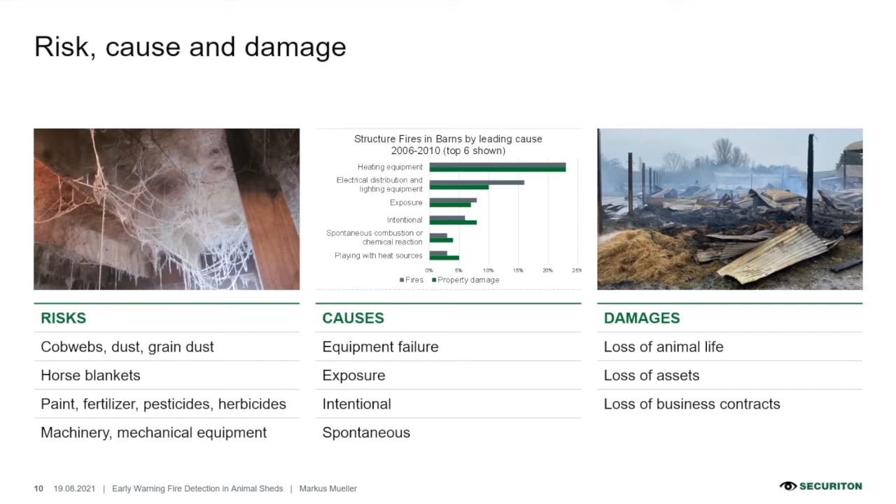While the NFPA states that $38 million in property damage was caused annually between 2006 and 2010, the Animal Welfare Institute focuses on the loss of animal life and highlights that from 2013 to 2017, more than 2.7 million US farm animals died in barn fires that potentially could have been prevented. Consequential loss of business contracts and the economic damage resulting from it to the farmers themselves is considered substantial, although it is statistically not widely documented.

Barns and animal sheds pose several challenges to an effective fire protection system, such as environmental challenges. We have high humidity and aggressive gases. We have overvoltage surges due to lightning strikes. We have loads of dirt and dust due to material handling, such as straw or hay. An animal shed, the facility itself, is a large, partly open space in which changes in the airflow are very common, as cooling may be required during the summer and heating during the winter. Airflow conditions may also change during the day.

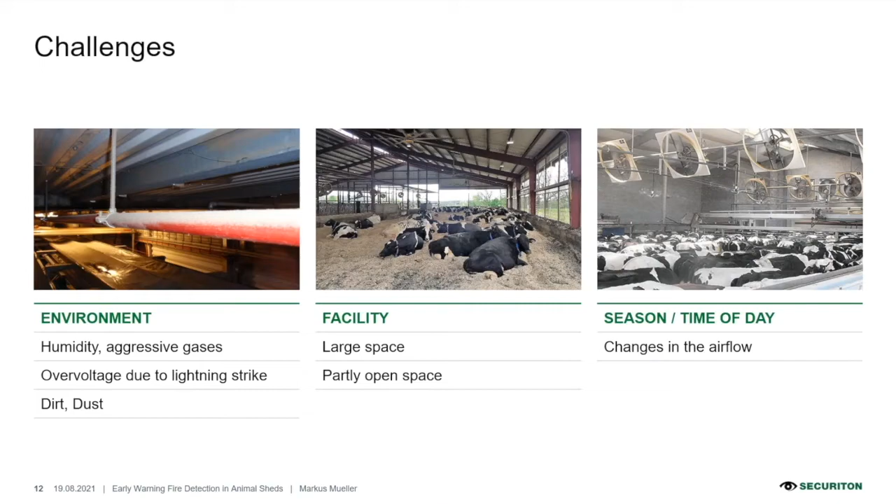There are only few regulations in force. For Scandinavian countries, for example, there are codes and standards in force which cover the requirement for products used, here the FG 743, and also their application in farming facilities, here the NS 3960. The design of a fire detection system needs to be simple and to meet deemed-to-satisfy fire and building safety provisions, such as the NFPA 1, NFPA 72, or the British Standard 5839-1.

However, applying a performance-based design approach addresses risk-based detection needs over and beyond prescriptive requirements to ensure business operations and asset protection as recommended, for example, in NFPA 150 or CFPA E17. What does applying a performance-based design approach to address risk-based detection needs mean? To answer that question, we need to look at it from different perspectives.

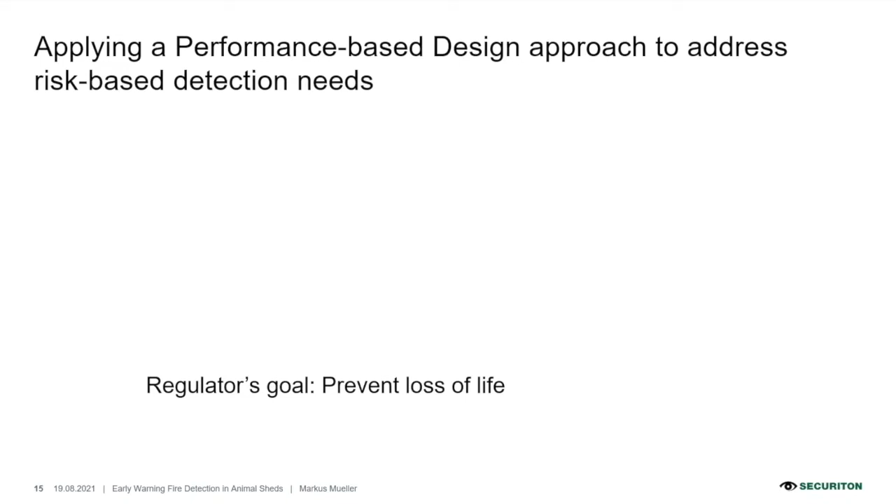The regulators, for one, their perspective is to protect lives. The regulators issue codes and standards to cover health and safety of persons and not necessarily of animals in our context. Codes and standards such as the NFPA 15, the standard for water spray fixed systems for fire protection, cover these health and safety issues. However, the regulator does not concern themselves with asset protection or property loss issues. That is the domain of the insurers.

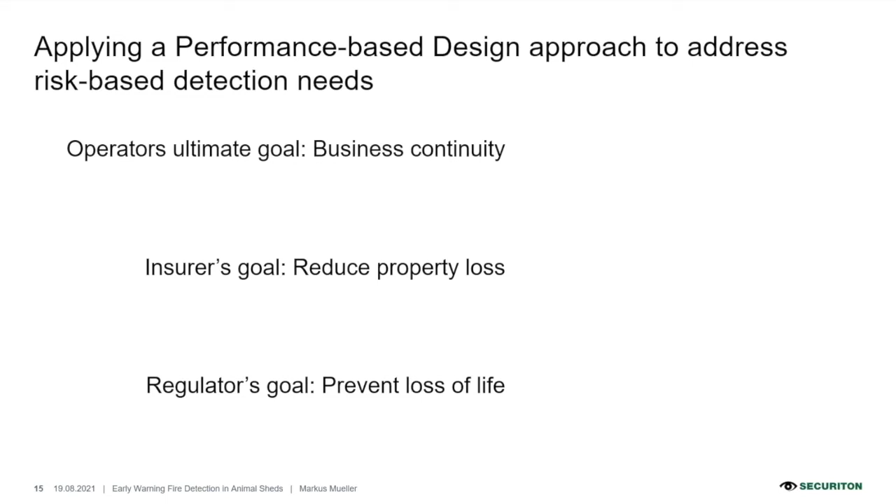FM Global issues recommendations such as the Property Loss Prevention Data Sheet, the DS 9-19, which covers wildland fire, with some issues in it relevant to the farming industry. But they offer no coverage for prolonged business interruption. The operator's ultimate goal is ensuring that his business runs smoothly. Now, how do we achieve all this?

Compliance-based design mainly covers the regulator's goal. To cover the other two goals, we need to apply a performance-based design approach. That is to consider fire ignition scenarios and design for these scenarios. In other words, we need to seriously ramp up from sprinklers. We need early warning coupled with a decisive response.

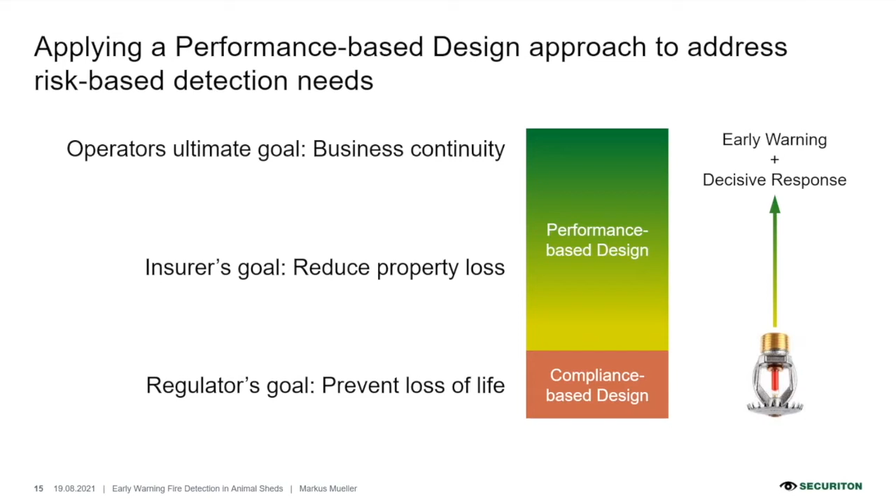Before I touch on the application scenarios, harsh environments in animal sheds, the range of solutions approved varies considerably. The approved solution to overcome the challenges that I mentioned before is to design a reliable early warning fire detection system with multiple alert levels that is capable of operating in harsh environments with aggressive gases, high humidity, and lightning strikes. But before we look at some key design factors in more detail, let's explore early warning fire detection a bit further.

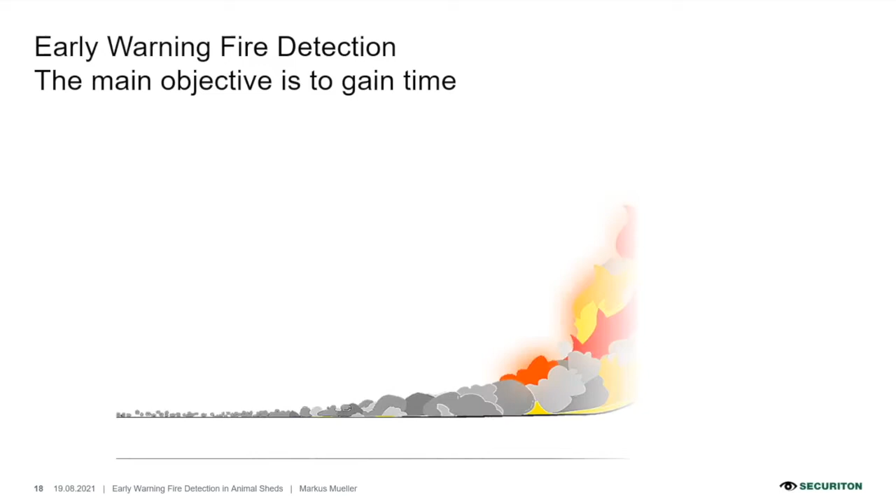The key objective of an early warning fire detection is to gain time. Time to adequately react to the development stages of a fire. This is the typical development of a fire. In its incipient stage, for example, caused by a smoldering wire due to an overload, there is only limited smoke produced. Again, the incipient stage may develop over hours or in some cases over days.

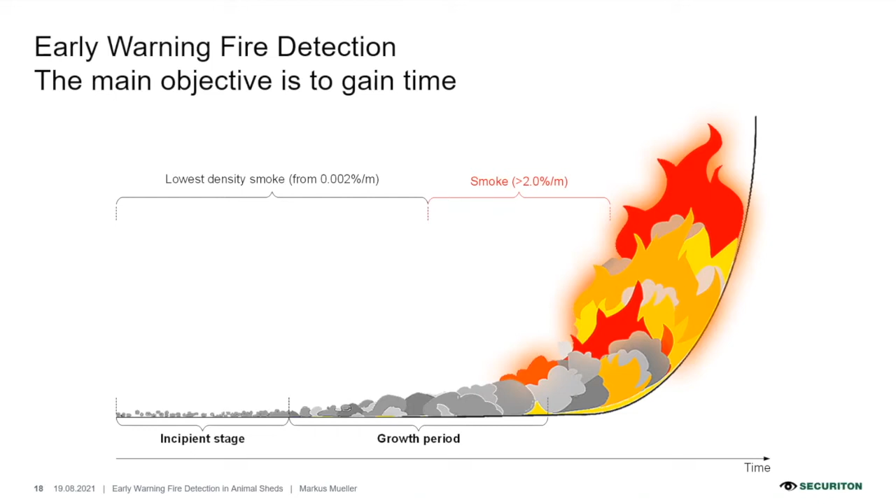To reach the growth period of a fire, during the early stages of a fire, the smoke concentration is typically below 2% per meter obscurity. Only in later stages, the smoke concentration will rise above 2% per meter, thus reaching a level where a standard point-type smoke detector could possibly trigger an alarm. However, standard point-type detectors do not meet the challenges we mentioned earlier.

A fire must reach a significant size to release enough heat to initiate sprinklers. Once the fire service is called, the fire brigade will take some time to reach the location. They will then need a certain time to assess the situation and set up gear before they can start fighting the fire. From a business continuation and asset protection point of view, clearly, an early detection of a fire minimizes loss and interruption, while the later a fire is detected, the greater our loss and business interruption.

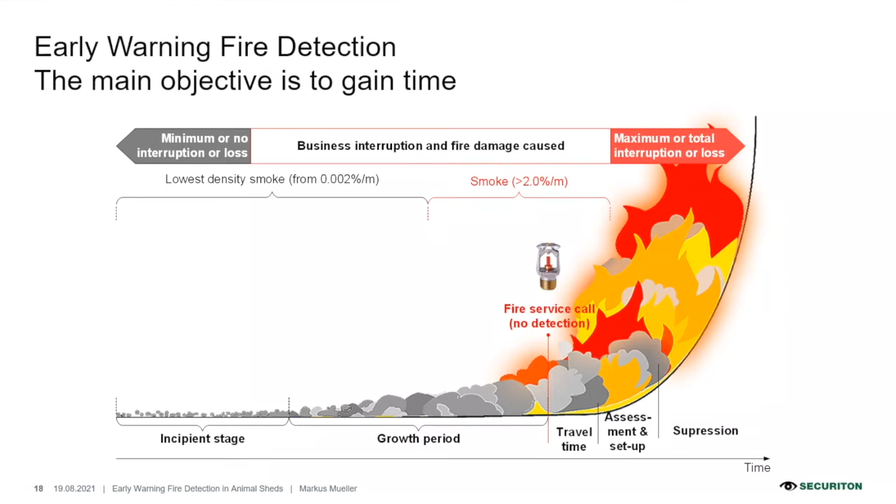As I mentioned earlier, we want to ramp up from sprinklers alone to an early warning system and a decisive response. That is where the 5 levels of SecuriSmoke ASD 535 HD come into play. Detected at the first level, a fire incident can be prevented in most cases. If the smoke concentration rises to trigger the second level, local firefighting may help prevent larger damage.

At a later stage, shutting down ventilation systems and starting the evacuation of the animals may be the right response to the developing situation before a fire service call is issued, notably a lot earlier than with sprinklers alone. Remember, it's all about gaining time. Even before the fire releases a thermal load to initiate the sprinklers, triggering a pre-action suppression system helps minimize losses.

Now, before we dig into some key design factors, I would be happy to answer a few spontaneous questions.

Markus, I've got a question. Is the aspiration smoke detection principle suitable for all types of animals in sheds? Or can it be used for horses, cows, and other animals? Yes, that's it.

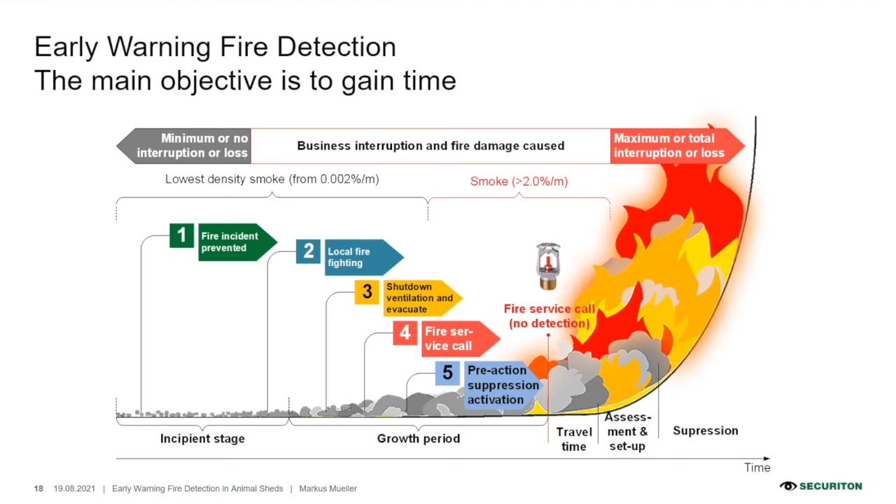Thank you. Okay, now what are the key design factors? As animal shed design and utilizations differ, we just found out cows, horses, pigs, and so on, the fire protection solutions differ as well. When designing an early fire detection solution based on the SecuriSmoke ASD, bear in mind the following key factors. Use the SecuriSmoke ASD 535 HD and the accessories which are hardened for the use in environments with corrosive gases and feature an enhanced overvoltage protection.

Airflow changes within the protected area due to ventilation systems installed and/or natural ventilation. Bear in mind the general characteristics of the building or the protected area. For example, is it a flat roof, a pitched roof with or without ventilation through openings in the pediment, considering possible smoke stratification effects, and so on. Consider the general partitioning of the protected area. For example, are there milking stalls, individual stalls for calves and foals, and so on.

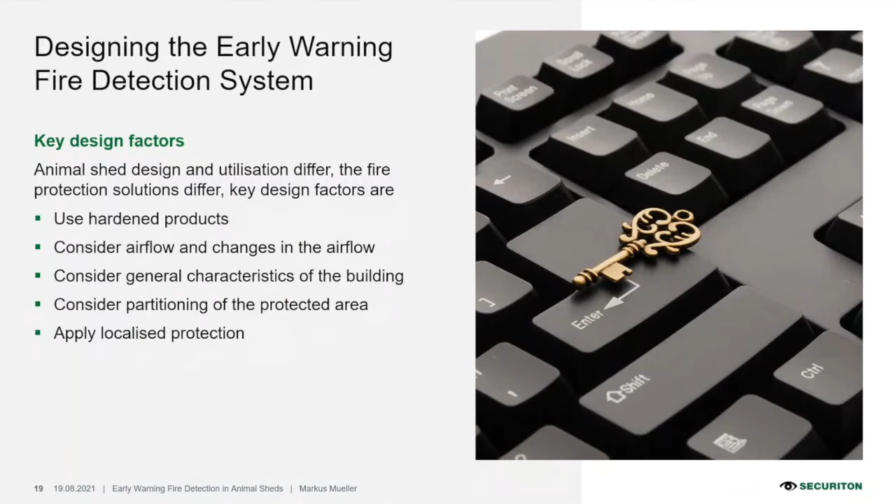Apply localized protection of electrical equipment, such as robotic mixers or feeders, grooming brushes, milking stalls, and so on. And last but not least, ensure that alarm and fault notifications mentioned before, the 5 levels, can be heard and are also reacted upon, in particular in cases where the shed is at a remote location or is operated completely unattended.

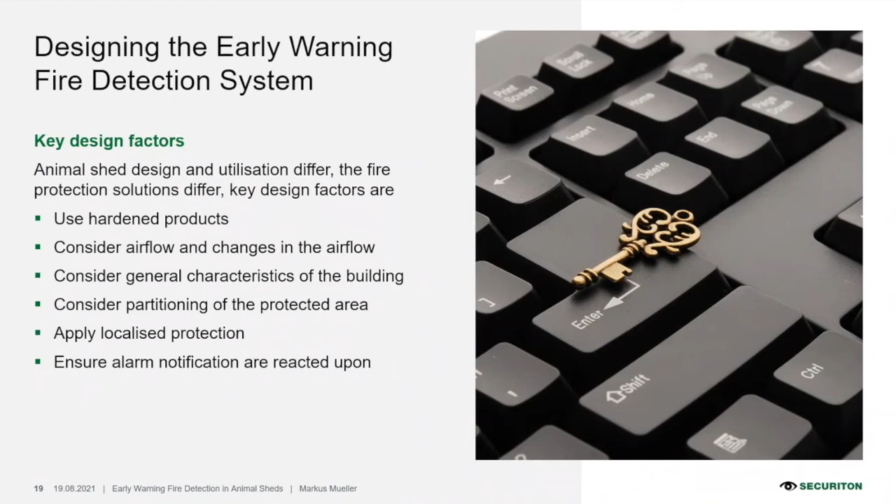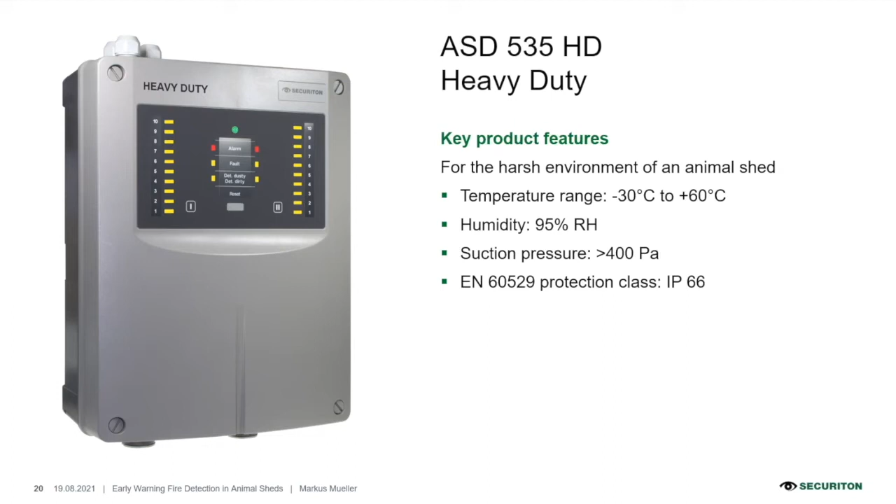Now, some key design factors in more detail. The SecuriSmoke ASD 535 HD or heavy duty is the recommended choice for harsh environments found in animal sheds. It can operate in temperatures ranging from -30 to +60 degrees centigrade with a relative humidity of up to 95%. The fan's suction pressure of more than 400 Pascal ensures reliable detection of smoke when there is a high airflow and a high degree of change in the airflow. In addition, the ASD itself offers a protection class of IP66 according to EN 60529.

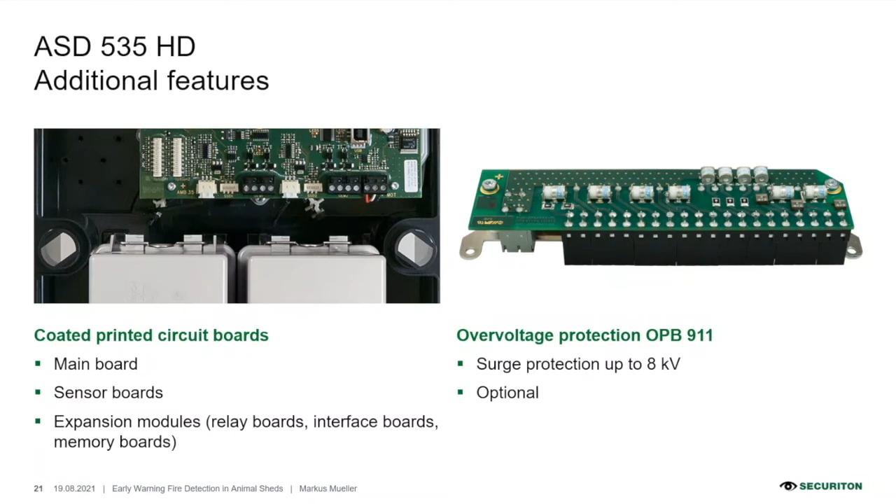In addition, all printed circuit boards within the ASD 535 HD are coated, and an optional overvoltage protection board is available. This allows for the ASD to be installed without the need of costly additional protective housing. Another key design factor is to consider airflow and changes in the airflow, as I have mentioned before.

For a large open space, such as an animal shed, a SecuriSmoke ASD early warning fire detection system is used for ceiling detection to meet the prescriptive code requirements, but it is also used in enhanced detection performance designs to meet risk-based fire safety objectives to avoid losses due to fire damage and to ensure business continuity. The recommendations from NFPA 72 regarding the monitored area in function of the air exchange rate range from 6 exchanges per hour to 60 exchanges per hour.

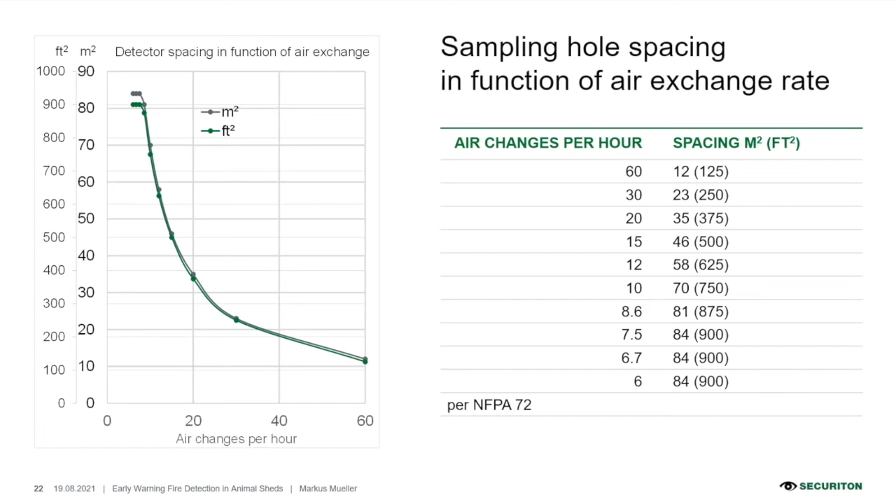In case the ventilation of the shed has a significant impact on the dispersion of smoke, it is strongly recommended to analyze the air currents in the protected area and to subsequently incorporate the results of these analyses into the design of the early warning fire detection system.